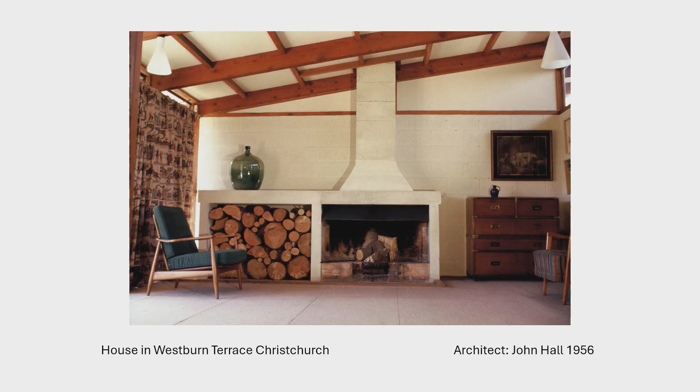I've been involved in architecture my whole life. The first 5 years was spent in this modernist house designed by my father. I fell asleep each night up to the age of 5 under these straw ceiling panels. They were Stramit panels that were manufactured in Australia and imported to New Zealand in the 1950s. I discovered this after my father had died, so I couldn't really ask him any more about it. But I think that perhaps they had an influence in my later career.

Also, another thing that may have influenced me is that we used to go and visit my Auntie Margot, who lived in a rammed earth house that her father built in 1925. So I used to go and visit there a lot. So I've been thinking about where my interest comes from, and I think that it might have been embedded in me from a very young age.

I guess I've always wanted to be involved in an architecture that is appropriate to place, that wastes nothing, and that really engages with te taiao, the environment, in a respectful way. I think that architects should be kaitiaki. And this pursuit has been done through a number of built projects, and then I got to a point in my career where I really felt this is no good, the occasional project at a time. It would be much better to be involved in teaching and trying to influence young architects. And so hopefully there's a couple in the room I might have had slight influence on.

I'm not going to talk much about my built projects today, bar one, but I have designed and had built about 9 adobe brick houses and 3 in straw. And then more latterly, I have switched my focus.

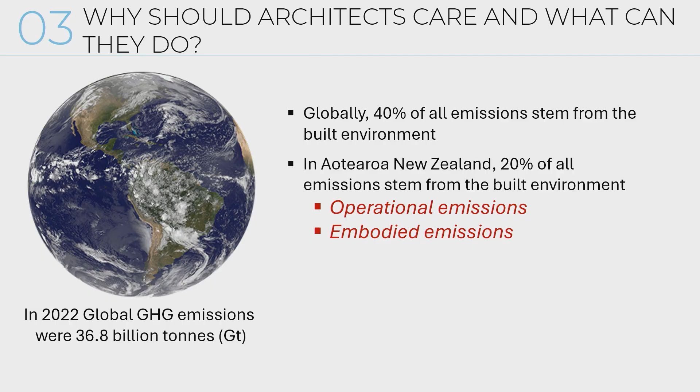40% of all greenhouse gas emissions globally result from the construction and operation of the built environment, and in Aotearoa that figure is about 20%. Two kinds of energy, operational emissions and embodied energy. I think everyone knows what those mean, so I won't go into it, but it's the embodied emissions that we are really focusing on now, because over the past 20 years or so, we have really upped the game in terms of operational energy and insulation requirements, etc.

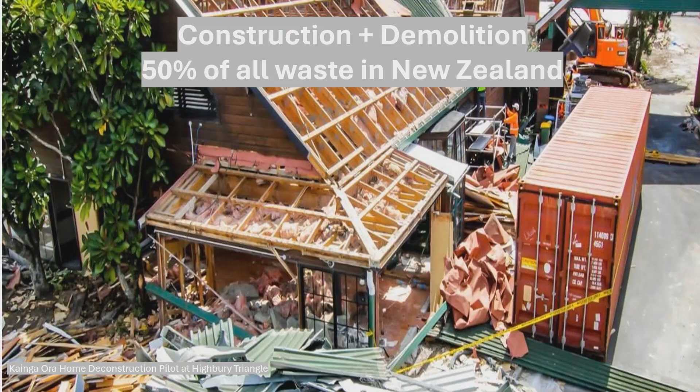So globally, it is estimated that embodied emissions make up around 20% of the total built environment emissions, so about a fifth. So all we can assume is it's going to be something similar here. And then add to this the fact that 50% of all waste in Aotearoa comes from construction and demolition. It's a massive amount that leaves our building sites every day, really.

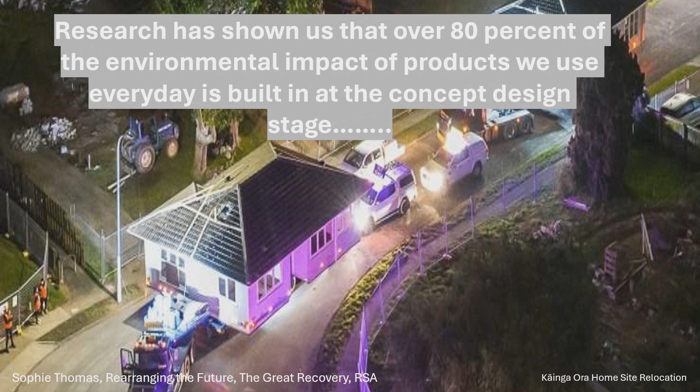So a key thing that we're attempting to provide knowledge to help answer this question is that the decisions made at the beginning of a project really play a huge part in the amount of waste that is generated through the process, and it really influences the carbon footprint.

This is an approach, once again from my lecture series, that is suggested by Architecture 2030. I don't know if you're familiar with that website. Architecture 2030 is from the United States, and it's really worth checking out. But basically, this approach is talking about adopting the principles of reuse, number one, reduce, number two, so reduce perhaps the amount that we're building and also the amount of materials we're using, and then to sequester carbon by using carbon sequestering materials.

This image here I think is really helpful. This is from MBIE. Has anyone seen this in your program? Yep, thank you, one person. Oh, cool. And this really correlates the various strategies for carbon reduction with the decision-making process.

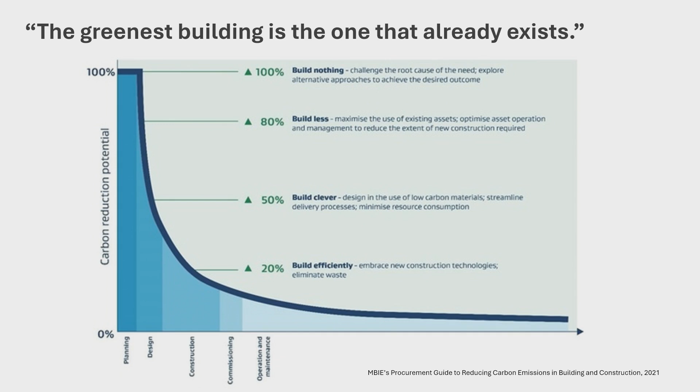So you can see along the bottom it's got the decision-making process, which is about planning, design, then detailed design, etc., right through. So what we're really looking at in the beginning is questioning whether you need this building at all. Then it's more about, can you use parts of a building at least, building less, and so on. So building smarter, building efficiently, but it's really asking some difficult questions up front of your clients, I would say, as an architect. You've got to make a living, I accept that.

I'll just add, actually, the reason that I went into teaching was that I felt like I had enough buildings built. I'm very fortunate I had a lot of projects built, but I wasn't doing the kind of projects that I really wanted to be doing. And so I thought, I can have more impact if I'm involved in teaching the next generation of architects. So that's what's driven me to be doing what I'm doing.

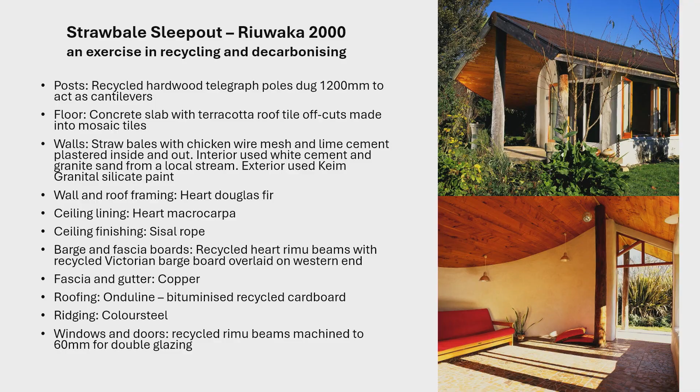but we used a white cement and we used sand from a local stream, so we got quite a cool colour. And on the outside we painted it with Keim Granital paint. I don't know if anyone's used that. It's a silicate paint. It lasts forever. This building's still never been painted again. Heart macrocarpa, heart Douglas fir.

We used Onduline as a roofing product, which I wouldn't recommend anyone do now. But at the time, this was very exciting. That was a bituminized recycled cardboard, but actually it can't handle our sun. So it's been replaced with a colour steel roof. And we used copper spouting. I'd be looking for some recycled stuff. But we didn't have any spouting at all on the back side of the building. The roof just came down quite low, dripping into a gravel drain.

And we wouldn't be doing a concrete slab if we were doing this now. We'd be doing an earth floor. So it was an attempt. And I still think it's probably a lot better than many other buildings down the road, for instance. So we'll see.

Returning to these questions, what does low carbon mean? Basically looking at what low carbon materials are. So basically they have low or no CO2 emissions, capacity to sequester carbon, and they are renewable. Not every one has all three of those attributes, but that's what you're aiming for.

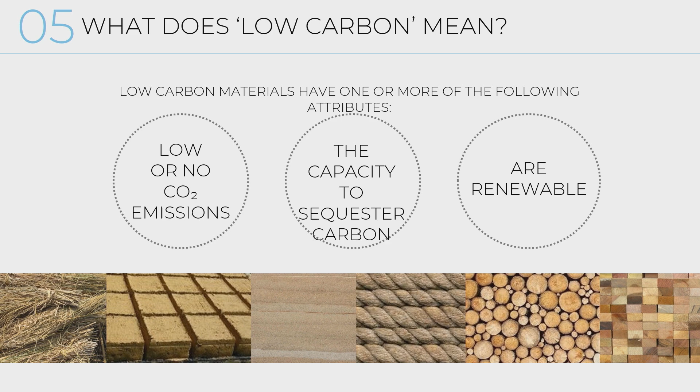Low carbon materials fall generally into two categories. There's geomorphic, which is earth and stone, and then there is biomorphic, which are the bio-based ones like timber, straw, hemp, and more. And so together they are often simply called natural materials. Despite that being a bit problematic in some ways, because asbestos is a natural material, but we won't go there.

Really important to acknowledge that Māori have used indigenous materials, raupo, harakeke, toi, for building with for generations. They also used earth as a binder for many of those materials, and earthen floors, and also mounding up against the walls of houses for insulation. But they weren't using earth in a structural manner. That came with the settlers here.

Many low carbon materials are actually considered waste and treated as such. Here I'm referring quite specifically to straw. I'm referring to the hemp hurd, which is basically the stalk of the hemp plant. And so whilst the leaves, the fibres, the oils are all used, if we weren't building with hempcrete, we'd be wasting that as well. Also, earth.

I mean, how many times do you see truckloads full of clay around Auckland, leaving site and going off somewhere to be dumped? Hopefully Alan Drayton's diverted them and they've come via one of his jobs and he's going to turn them into a beautiful clay. But it's just this kind of thing that we are wasting a lot.

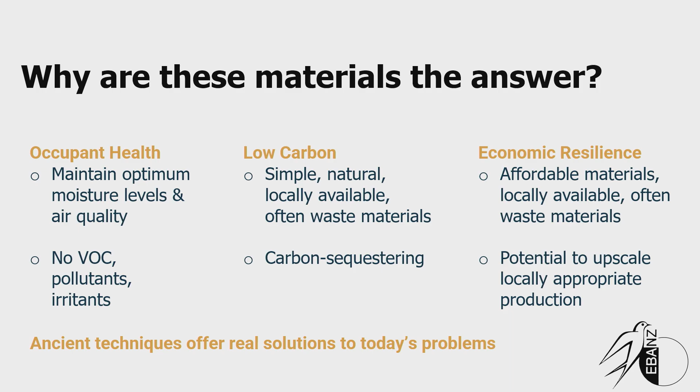And I think that whole thing about upscaling is where we're trying to move the Earth Building Association, for instance, which has been really geared at enabling people to do their own thing, to build their own houses, or with a skilled builder. It's quite geared for that, but it also now wants to acknowledge that we really need to upscale if we're going to make a difference.

So a bit of a plug for the Earth Building Standards. These have been revised and reflect current best practice engineering requirements, and they're also importantly involving more lightweight insulating techniques. So NZS 4297 is for engineers. A few engineers in the room, Eddie. But I don't look at that very much. But I do look at this one, materials and construction for earth building. This is 4298. And then 4299 is kind of the NZS 3604 of the earth building.

And it allows you to build a simple dwelling without needing engineering design. It also has in the back 3 appendices. One of them is for using adobe brick as a veneer, so getting the thermal mass inside a building, which I've done in a number of buildings I've designed, and it's really quite a good thing to do. You want your thermal mass within your building. And then it has an appendix which is about straw bale construction, and one that is about the light earth method. So I will just explain a little bit what those things are in a minute.

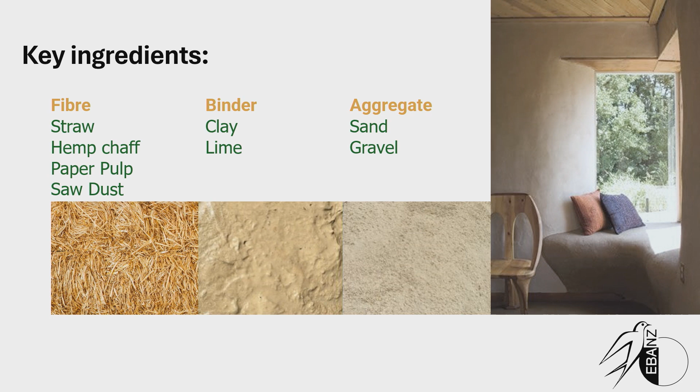But essentially, the key ingredients that are covered in the Earth Building Standards are a fibre of a number of varieties, a binder, and aggregates. So if you just want to be very simplistic about it, that's what we're doing. Just should mention here in terms of the hemp world that Doug Sturrock from up north has come up with a product called GeoBind for hemp, which is trying to come up with a binder that does not use cement. That has always been a bit of a negative that purists would have about hempcrete, that it still involves cement. Cement is involved in most earth buildings as well, it's fair to say, at least for the foundations, but it's just trying to keep it to a minimum.

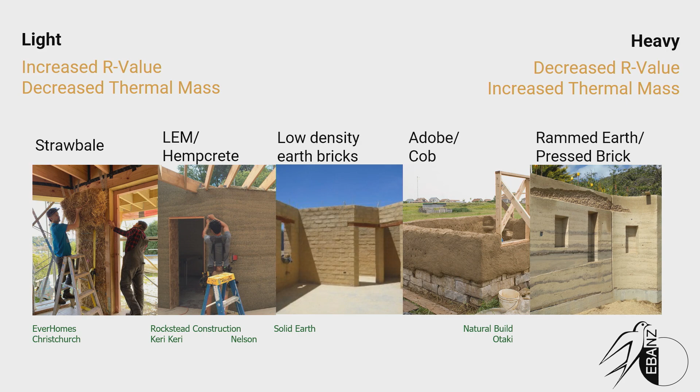This gives a good overview of the methods that are covered in the standards, with their corresponding thermal qualities. So going left to right, you've got straw bale, which is lightweight, not so strong on the thermal mass, but it still has some by the time it's got its plasters on it. Very good insulation values. And then you've got light earth method and hempcrete, which are somewhere in the middle, low density earth bricks, adobe and cob, and then rammed earth and pressed bricks, which are the densest ones. So Alan's going to talk more about them. But yeah, that's probably what I've got to say about that.

I'm hoping that these slides will be available to everybody afterwards, because I have printed off some more of a definition here. This is from the definitions in the front of the earth building standards. What I keep finding is people say, oh, have you seen that cob house down the road? It turns out to be rammed earth. Or they tell me, have I seen a rammed earth house somewhere, and it's actually out of adobe brick. So it would be great if you guys who are involved in the design of buildings got more of an understanding about what is what.

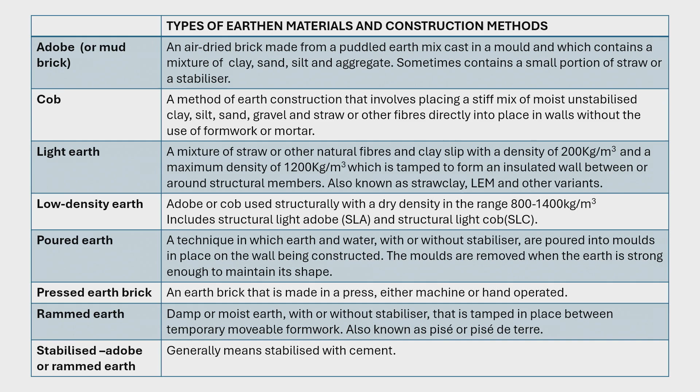So the traditional adobe bricks or sun-dried bricks, I'm not going to go through them all, but it's basically a puddled mix of earth, which has got a high clay content, some silt, and then it's usually got some straw in it as well as sand, and that is poured into a mould, and when it can hold itself, the mould's lifted off and it's air dried. So that's one end of the alphabet. They are actually just in alphabetical order. And also, stabilised, when you're talking about earth, generally means that it's got cement in it. But there's been a lot of work gone into low density earth lately.

How am I going for time, by the way, Jazz? All right? Yeah.

I'm probably about three quarters of the way through. Okay. All right. So you can look at that one later.

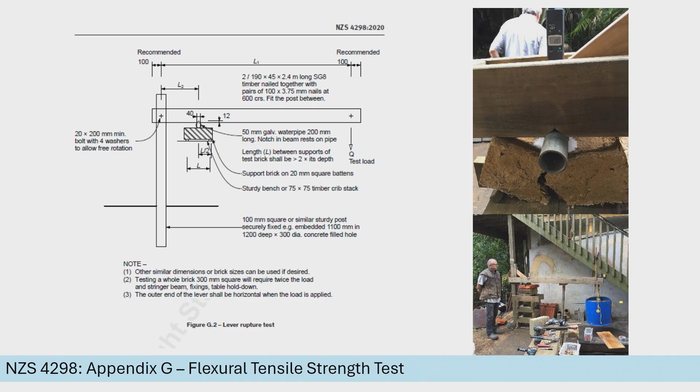NZS 4298, this has got a lot of fun stuff in there. This is about materials and workmanship. And a really good part of 4298 are the tests at the back. They've been developed over time, and they've been developed specifically so that you don't have to go to an expensive lab to get your earthen material tested. You can actually do it at home, or you can do it at Alan's place, which these photos are here.

This is the flexural tensile strength. So you make a mixture of a variety of different bricks, and you test them for various things. You're going to test them for water penetration, and you're going to test them for different kinds of strength. And did anybody see Grand Designs and the rammed earth house last week or whatever? Yeah. So those builders there were using this test as well. So it really can get used.

It's fair to say that the members on the committee of the Earth Building Standards were really still wanting to make sure that this still enabled owner builders, but it's also aimed at helping anyone who wants to be involved in designing earth buildings. Don't think I need to say anything more there.

Probably a key thing here is, oh there we go. Structural light adobe, SLA, and there's also structural light cob. It came about as a response to not being able to satisfy the old H1 with regular heavyweight earth bricks. And so coming up with the idea of how can we make them perform better and insulate them more.

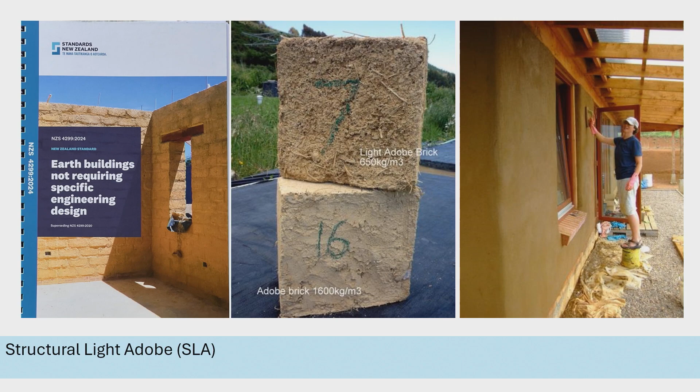So this work began, I don't know, 10, 15 years ago, of making a whole lot of earth bricks using different materials. Some of the key ingredients have been paper pulp and wood shavings and sawdust. I know Alan's been involved in trialling different ones as well. But that is really kind of where we need to be going. If we're going to be using earth in this country, we need to have it more lightweight. It's also much easier on the body when you're handling these lighter weight bricks.

Before anybody asks me about H1, I'll just say that generally for an earth building, you're better off to do some thermal modelling to figure out what's required, and you'd always be beefing up the insulation in the roof, which you have to do anyway. So that's been something that we have grappled with over the years.

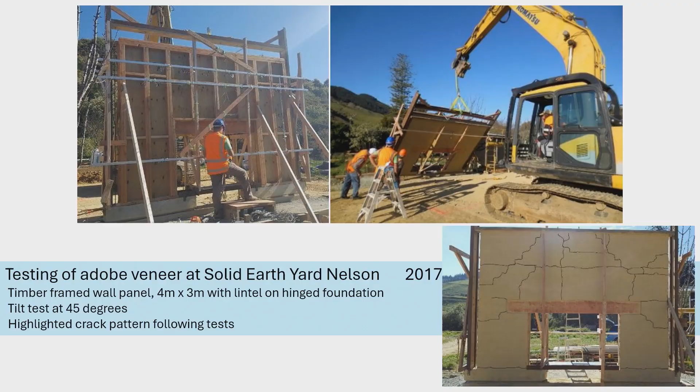So a whole lot of testing was done at the Solid Earth Yard in Nelson, led by Hugh Morris from Auckland University, where basically they had a hinged foundation, they built an adobe veneer wall on top, and they shook the hell out of it with that digger. Engineers do testing until things break. Those cracks aren't necessarily bad, they're informative. And so what that was telling us was how well we needed to fix these bricks to the timber framing.

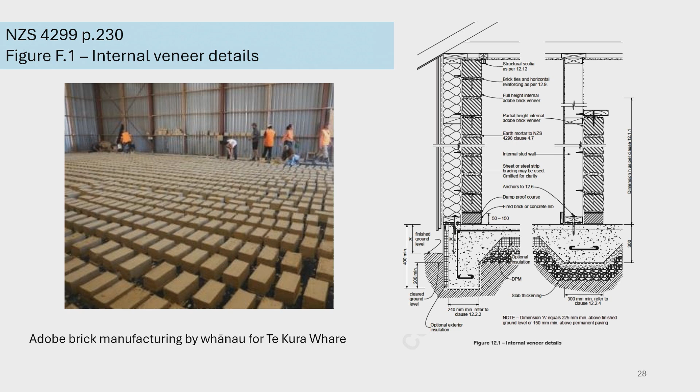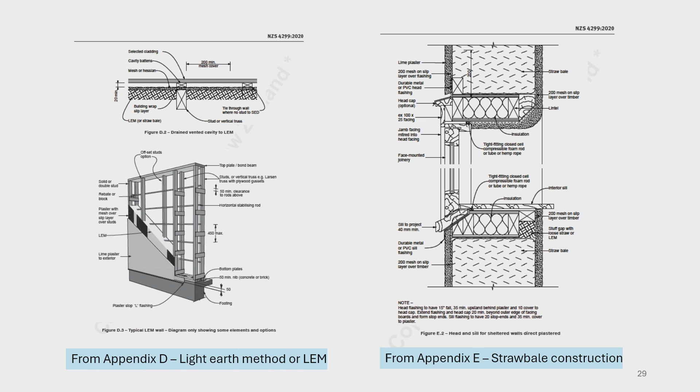So this is meant to be an introduction, and I think it's giving councils, it's giving homeowners, it's giving engineers who haven't done this before, it's giving architects some tools to not be afraid to give these materials a go. And particularly if a client comes to you and says, I would really like to try doing this, then that's your best client, not the ones you've tried to convince to build out of straw or something, because then if it fails, it's going to be your fault. But look for those clients who come to you first.

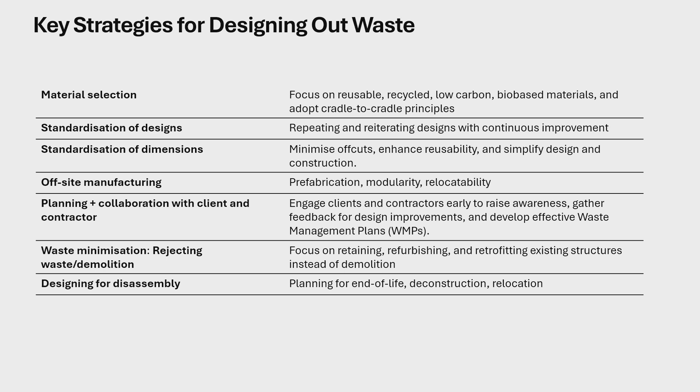I could just about finish there. I've got some, here, this is just sort of summing up strategies about starting new designs, etc. But I kind of think there's too many words on these slides, basically. But we can have it. But just point you to this tool.

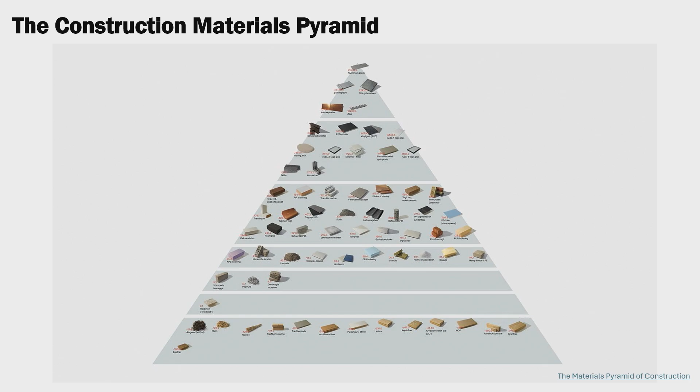Whoops. One here, this is from Rachel. This is the construction materials pyramid. And there is actually the website down the bottom here, but it's basically going from the highest embodied carbon content at the top of the pyramid down to the lowest at the bottom, and pretty well all the materials I've just been talking about are in those bottom two tiers down there.